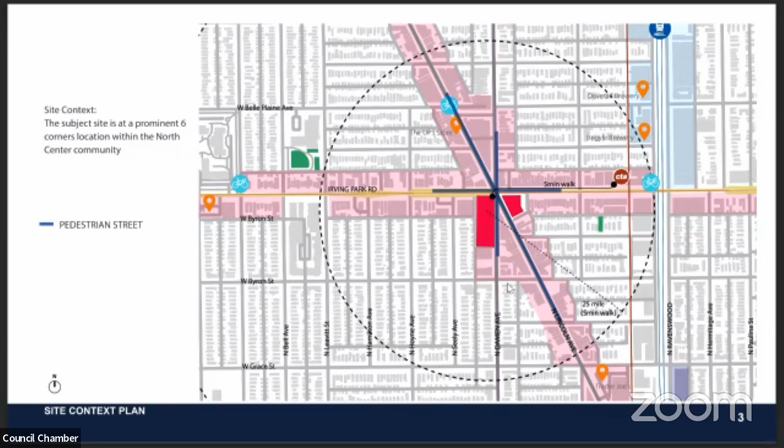This is a unique partnership between a market rate developer and an affordable housing developer, and together they are planning a transformative project for the North Center neighborhood. Alderman Martin and his staff were instrumental in developing the vision for a project that leverages private investment in a market rate project for the benefit of a 100% affordable project at this prominent location, which is shown here and located on either side of Damen Avenue at a six corners location intersecting with Lincoln Avenue and Irving Park Road.

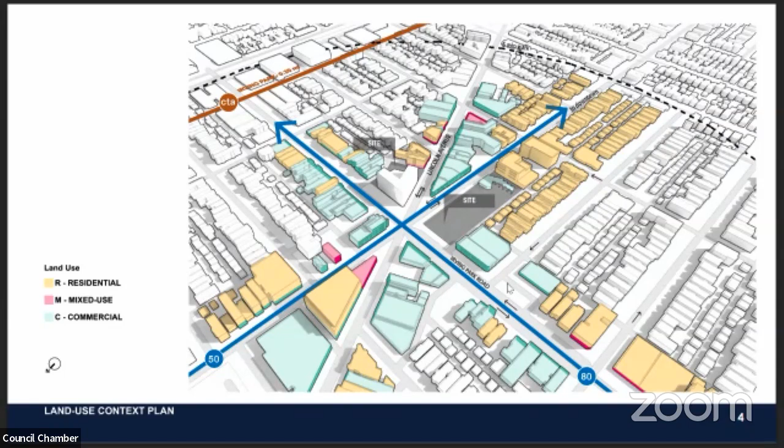You'll note on this slide that there is a range of land uses in this immediate area, including commercial, residential, and mixed uses, which are indicated on the slide.

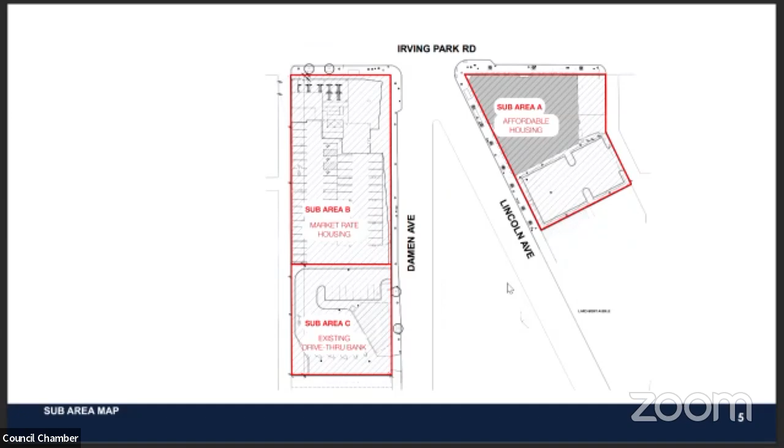In just a minute we'll get into the details of the plan itself, but this slide shows the three sub-areas. The market rate project is in sub-area B and is located on the west side of Damen Avenue. The affordable project is in sub-area A and is located at the southeast intersection of Lincoln and Irving. Sub-area C will remain a drive-through bank operated by Fifth Third Bank, which is the current owner of the properties consisting of sub-areas A, B, and C.

What makes this project particularly unique and compelling is the partnership between the market rate housing developer and the affordable housing developer. Sub-area A will be conveyed to a Brinshore-controlled entity and developed as 64 units of permanent supportive housing for survivors of gender-based violence. Every unit will be affordable along a continuum of affordable rents and unit types. Many of the occupants will be immigrants and refugees and will receive assistance from CHA and other sources of subsidy.

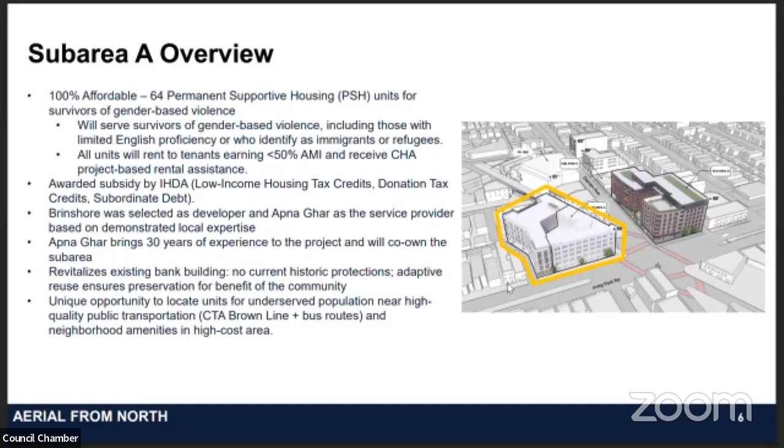The affordable project has received an allocation of low-income housing tax credits and other tax credit sources, as well as conventional sources of financing. Through the Alderman's leadership in the community process, Brinshore was chosen as the affordable housing developer and Apna Ghar as the service provider. Together, they will rehabilitate and adaptively reuse the existing bank building and the larger bank building, what we refer to as the white building on the corner, and fulfill a critical need for the affordable housing and supportive services that are required for the benefit of this vulnerable and underserved population.

It's also located at a transit-rich location served by train and bus modes of transportation in an area of the city at which there would otherwise be very few housing options available for this community of residents. It's been my personal pleasure to work with the development team, aldermen, city departments, and neighborhood to deliver a project that is both pioneering and worthy of this commission's support.

I would like to now turn the presentation over to Johnny Noble from the Lamar Johnson Collaborative Architects, who will walk you through the project in a bit more detail. Great, yeah, and I'm Johnny Noble, design architect with LJC. I'll go kind of quick, so if you have questions at the end, we can go back to anything.

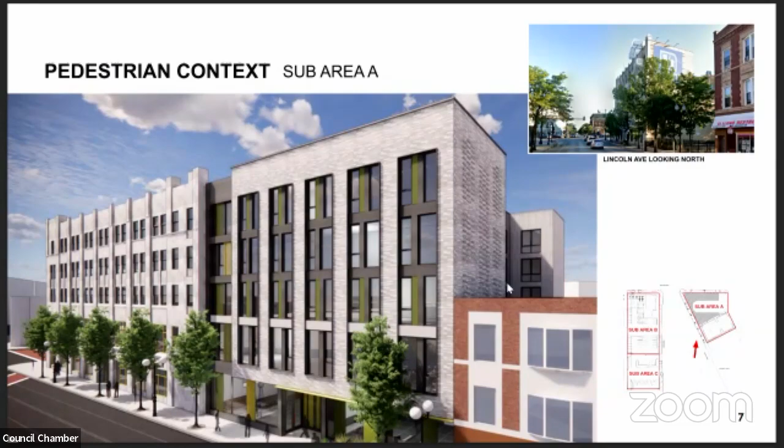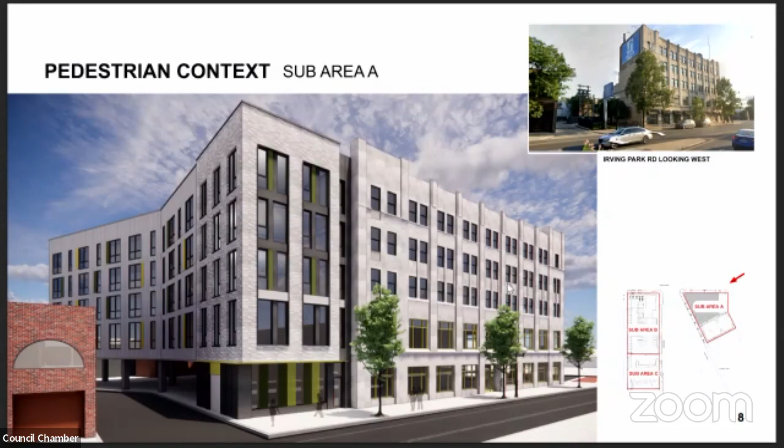So what's on the screen is sub-area A, the existing building on the left, the new addition on the right, sympathetic in materials and scale. This view is on Irving and Damen looking west. Again, the existing building to the right, the new addition wrapping around to the left, darker windows to match the existing, and a light color brick to match the existing tone.

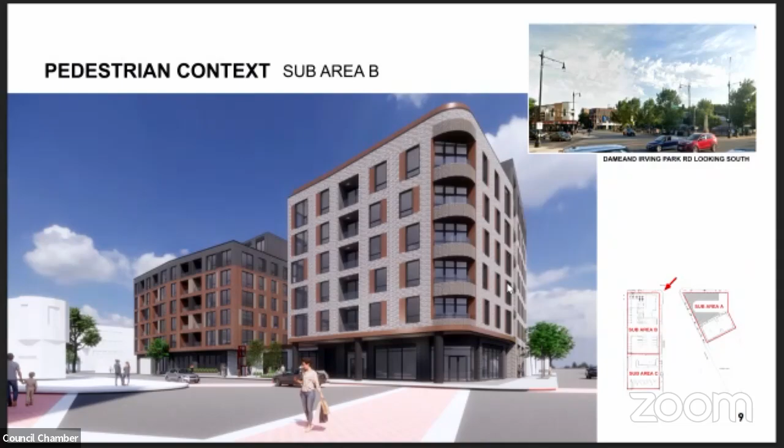At sub-area B, this is the now vacant site. This is a view right at the corner of Irving and Damen, looking at the prominent Six Corners intersection. You see the rounded corner as a prominent architectural feature to express that. As we come down Damen, now looking north, this is the new entry plaza that has ample space for some future public art, as well as adds quite a bit of relief for what could be a large building as you move south along Damen.

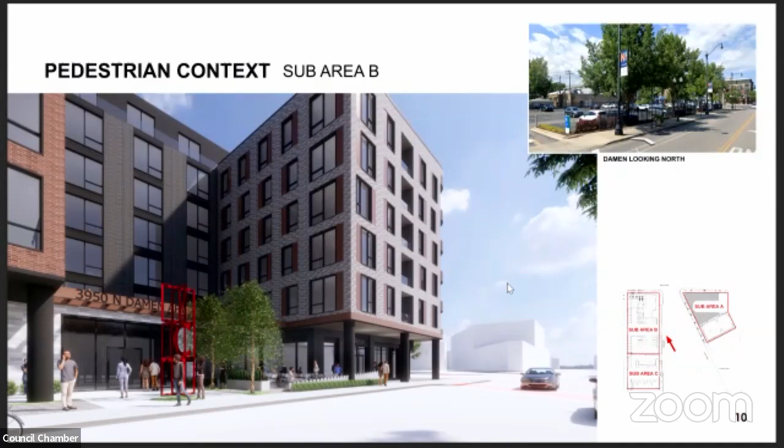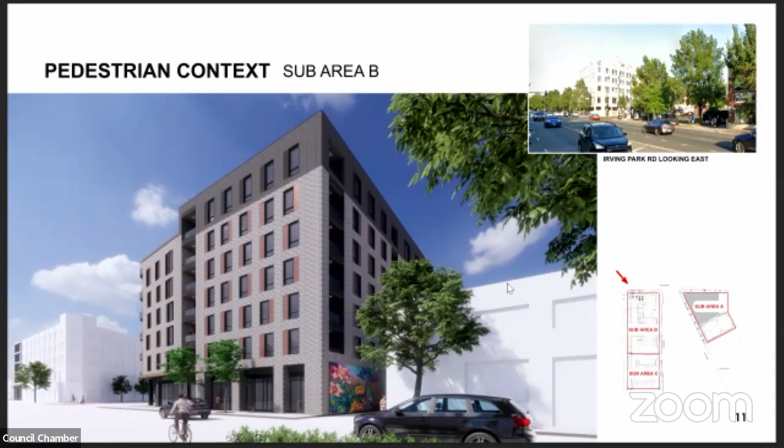This is a view on Irving looking east, and here we see again the lighter colored brick that should match the sub-area A tone of the existing and new buildings. Sub-area C is unchanged, as Rich mentioned, and is capped in the PD at 50 feet.

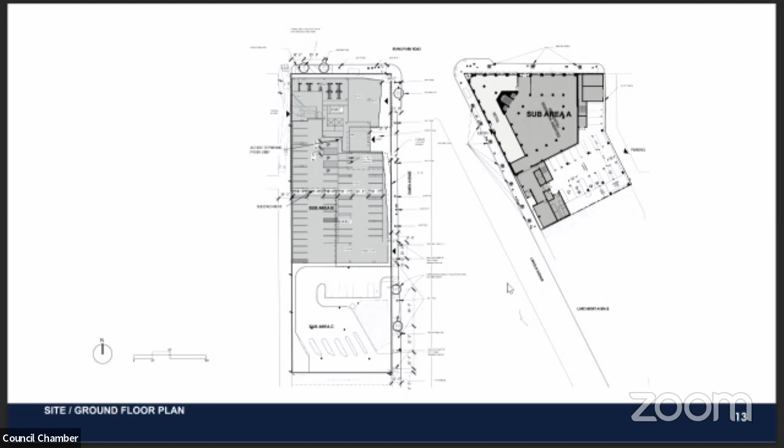The ground floor, both projects have a combination of parking, retail, and amenity. Sub-area A has 18 cars, very generous amenities for the residents, and some retail at the corner. Sub-area B has retail at the corner, as well as some amenity in the lobby as we move down Damen, and then 54 parking spaces.

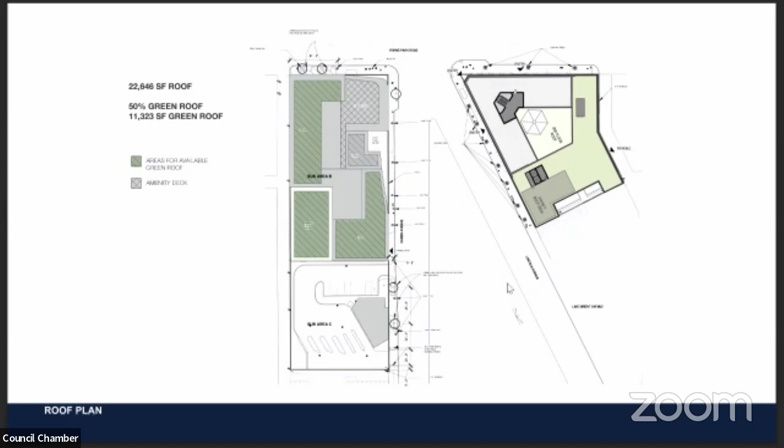Sub-area A has 64 units as mentioned, mostly 2s and 3s. Sub-area B has a total of 130, largely 1s and 2s. The project will have a 50% green roof as part of the sustainability policy. The market rate project will have an amenity deck on the 6th level.

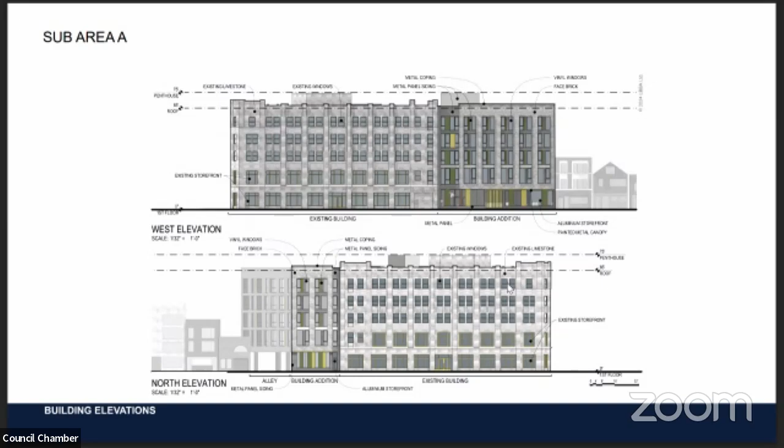The east and south elevations of the same project are secondary elevations on the alley and within the courtyard created, comprised of the fiber cement panel. So the primary elevations along the public streets are brick and metal panel, and the secondary elevations are fiber cement, still with an accent of metal panel.

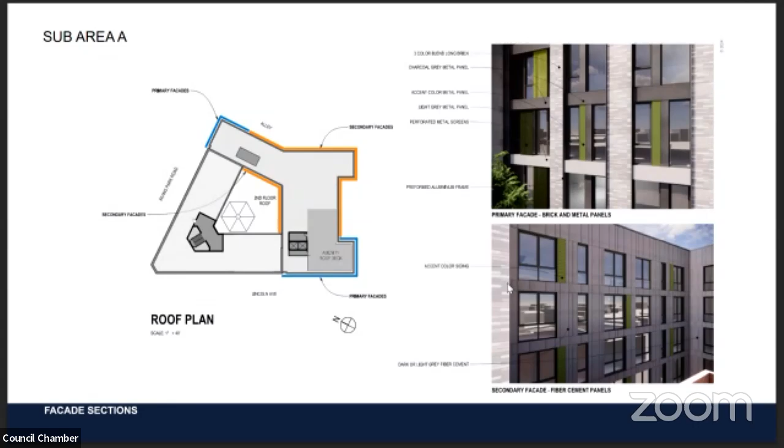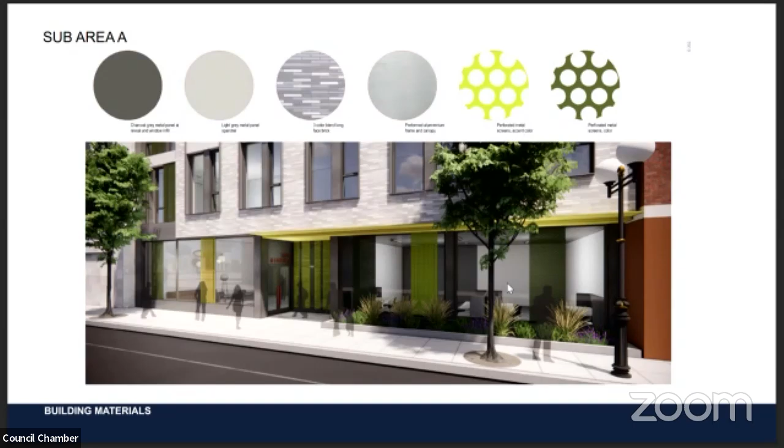The entry of sub-area A, you can see how they're using some nice green perforated metal to accent the entry, and then the remaining facade is a blend of light colored brick and metal panel.

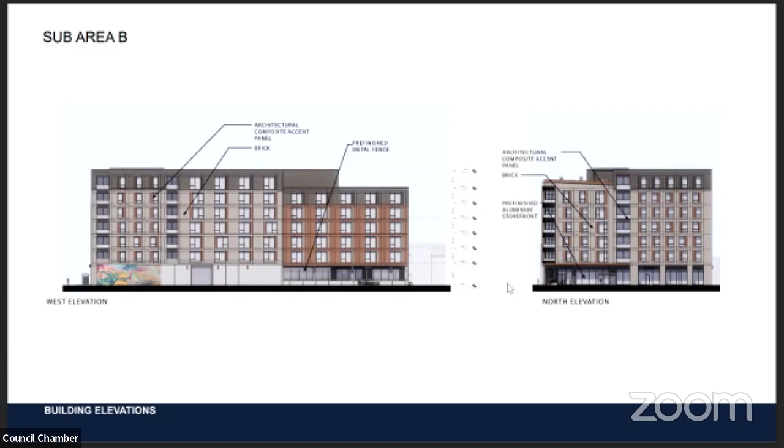The west and north elevations are also comprised mostly of brick with an accent of metal panel, and the balconies highlighted as vertical reveals.

The aerial here shows again the brick, how it changes per massing to break the scale as we go down Damen, with a light color brick at the corner, and then the red and gray accent panels throughout.

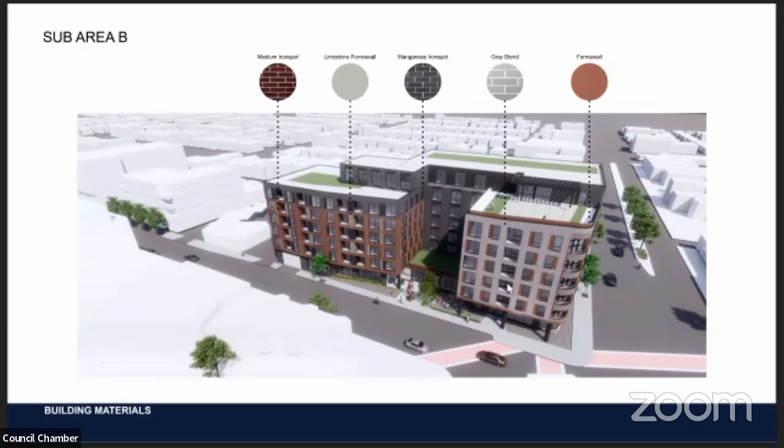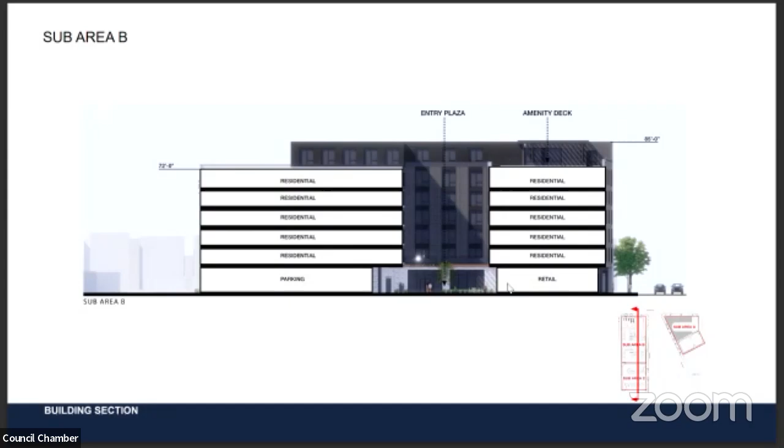Sections simply show this is residential over public amenity and retail. This is sub-area A, capped at 75 feet. Sub-area B has a maximum height of 85 feet, with 5 levels stepping up to 6, or 6 stepping up to 7, with retail over amenity and parking.

A little more detail in the axon. On the right image, you can see that high identity corner as rounded brick. On the left image, you see the recessed balconies creating more relief along the facade.

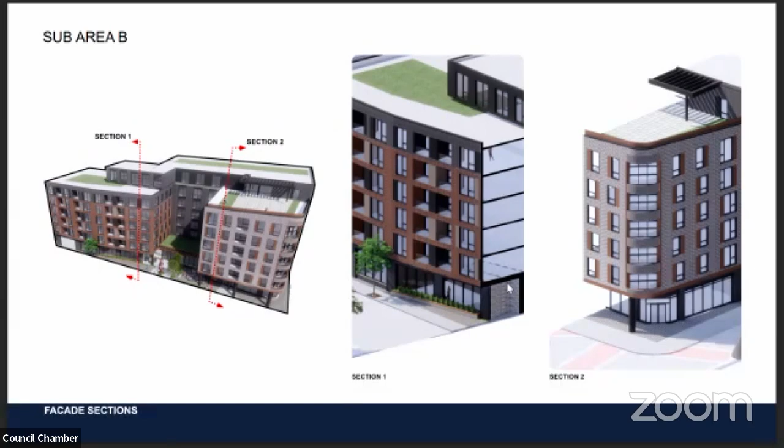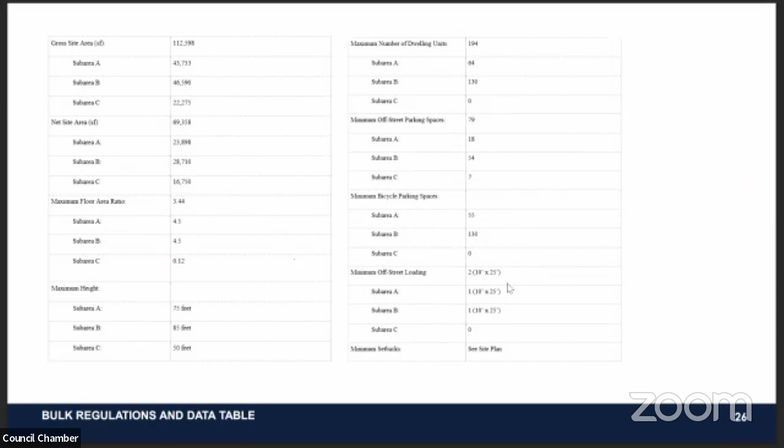The bulk table for your reference, a lot of it's been mentioned already: capped at 3.44 FAR for the combined site, with height of 85 feet for sub-area B, 75 for sub-area A, and 50 for sub-area C.

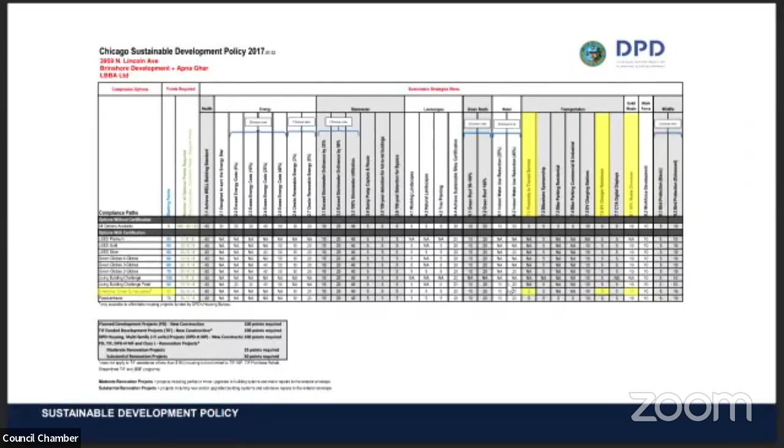We're still, until the end of the year, in the 2017 Sustainable Development Policy, so that's what we're going with. For sub-area A, a large portion of the points will be from Green Communities certification. For sub-area B, there will be a collection of points through energy, water, transportation, and others to get to the 100 points required.

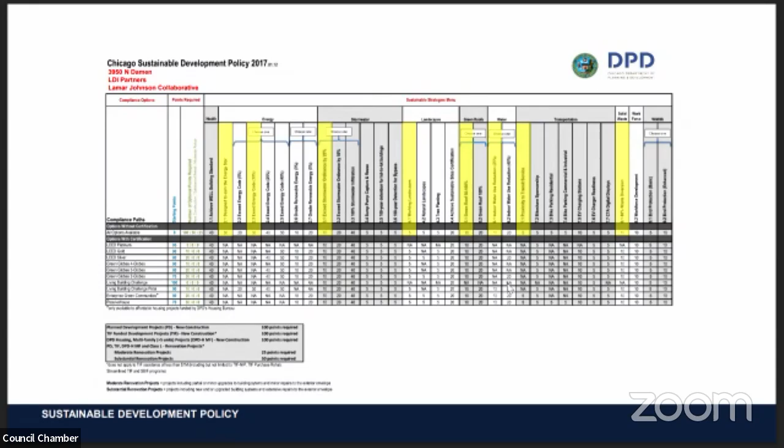In terms of open space and landscaping, I've already mentioned on sub-area B the 2,800 square foot entry plaza. That would be a great spot for some public art, as well as give some relief to the bus stop that is along Damen.

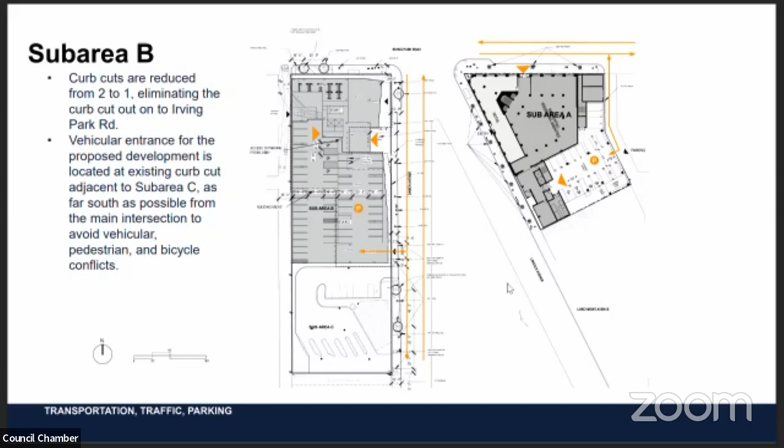In terms of circulation, sub-area A is accessed with its parking off of the alley, and then entries both on Irving and Lincoln. Sub-area B accesses its parking through Damen. There are currently 3 curb cuts on the site; we're coming down to just 1 for sub-area B, and loading is serviced off the alley.

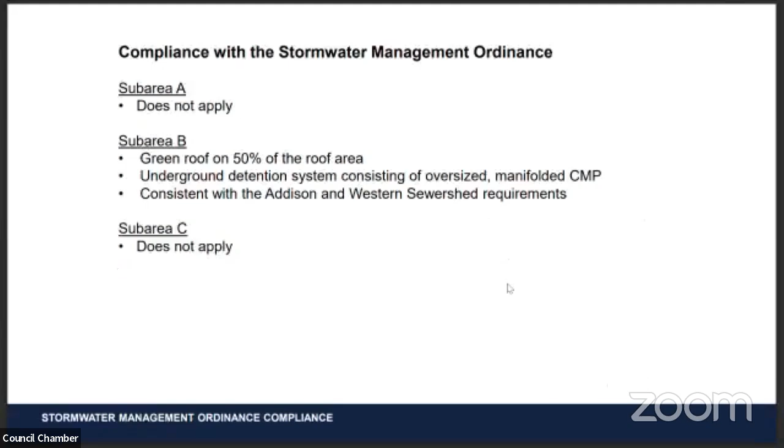Stormwater, again, the 50% green roof combined with underground detention will take care of the stormwater management ordinance.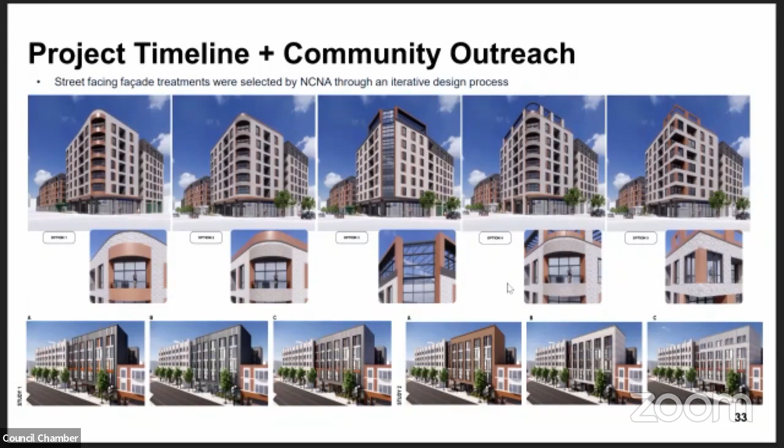This is a unique application of the Affordable Requirements Ordinance. We owe a great debt to Alderman Martin and DOH for helping us land on this approach. From the standpoint of the ARO, this project has 64 affordable units among a total of 194 units, meaning that on an overall basis, about a third of the overall unit count is affordable.

Income levels for the affordable units are also well below the minimum average weighted AMI of 60%. This is due in part to the permanent supportive housing units and the nature of those units, for which that project receives project-based rental assistance through the Chicago Housing Authority.

A quick word about the economic benefits before I pass it back to Danielle to close. There are other substantial public benefits associated with this project. In addition to the creative approach to providing affordable housing at this north side location to a vulnerable group of residents whose access to housing would otherwise be severely challenged in this neighborhood, we anticipate upwards of 230 construction jobs, several permanent jobs, neighborhood retail opportunities, open space enhancements, improved streetscaping, and of course, robust M and WBE participation pursuant to the terms of the city's executive order.

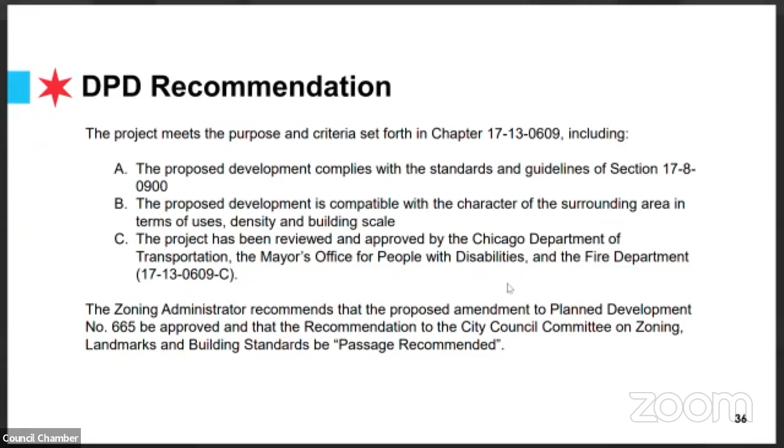For the record, my name is Butler Adams. I just want to stay consistent. I am in favor of this project.

I got a chance to go to the community meeting at O'Donovan's back in January of, I think it was 2023, so last year. And I liked the project then, I like the project now.

I like the brick articulation of the building. Not necessarily a fan of the metal panels, but I think it's a good addition to the neighborhood.

I know that the height has been reduced and the unit count has been reduced. I do wish that the unit count could have remained the same, even just by bumping up the height of the building a little bit.

I know there was some concern regarding some of the neighbors about the height of the building, but I don't think taller buildings inside of neighborhoods on commercial corridors are that bad of a thing. You look at Northwest Tower or the Coyote on, what is that, Damen, Milwaukee, and I can't think of the other cross street right now. But it's a 12-story tall building. It's been around nearly 100 years, and it doesn't impact the neighborhood in a bad way at all.

But I do think this is a good addition, and I do hope that once you all decide to go with that final phase, what the bank is right now, because you reduced the size, you can restore the 40 units that got cut from this project. And I also hope that you could possibly enhance that rounded base slightly more to make it a bit more prominent.

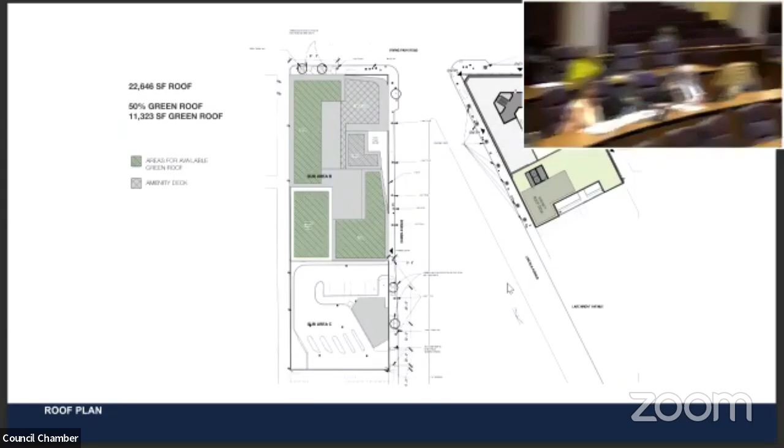If you wouldn't mind taking a, on the roof of the building, someone should take the mic please, introduce yourself. Tyler Brown with LBBA. The green roof on the roof of the building is accessible to residents, yes.

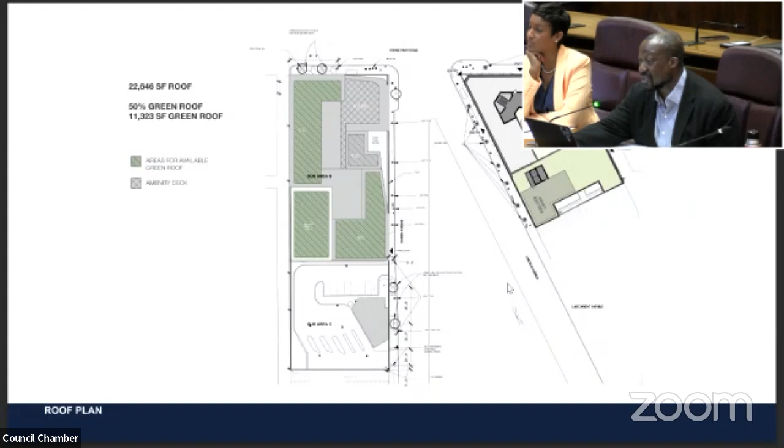Speaking on sub-area A also, I noticed kind of a unique way of laying the units out, almost kind of a shotgun, if you will. I do actually kind of appreciate the creativity. I would love to see how these actually rent, because I understand this site is very constrained and you're literally, in a good way, squeezing into units. Down the line, once this gets constructed, I would love to see how these rent, because I think this is a nice creative way to solve some other unit layouts. Just slide 14, yes.

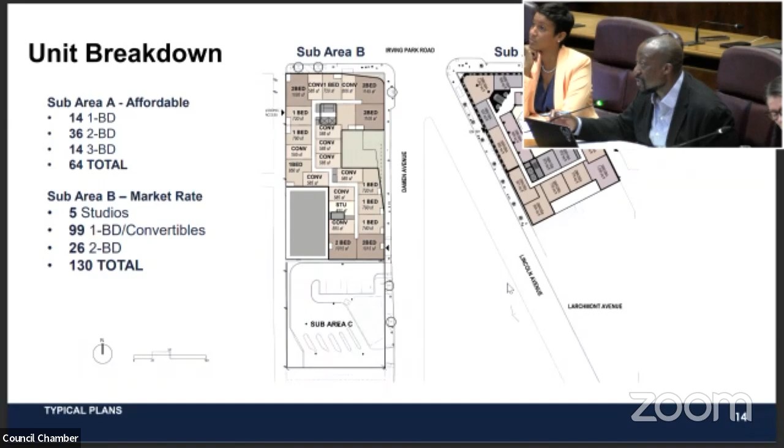It was just more of a comment, not sure if you can zoom in on this, but the units in particular, Commissioner Dow, that I'm speaking to are these kind of longer units. Typically, those units on a double-loaded corridor building tend to be 27 and a half plus or minus feet. These are pretty narrow units and long units. How wide are those units roughly? They're much less than 27 feet. Yeah, the existing floor plate of the bank is pretty shallow, so getting the double-loaded corridor made for wide but shallow units.

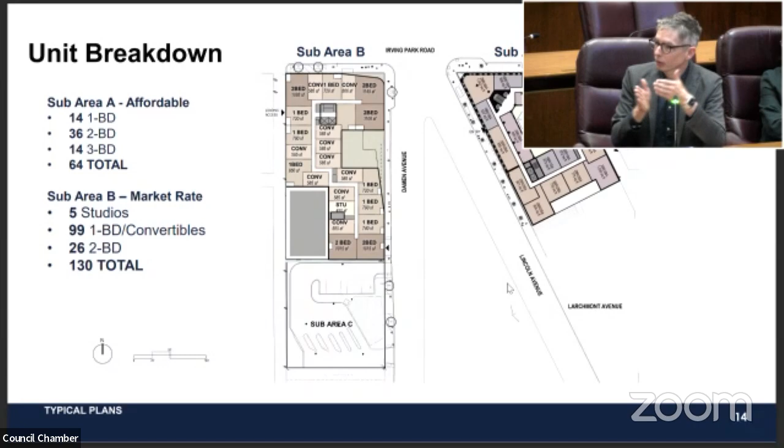I think they're something like 18 feet deep, 18 feet in depth. But we think it's going to actually make pretty nice units because they're going to have a lot more windows than they normally would on a narrower, deeper floor plate. No, we'd love to see how these rent down the line, it could be an interesting prototype that gets introduced on other buildings. And to clarify, that's part of the affordable building, so it'll be part of the services they provide. Understood.

I do understand that Josh Mark is here on behalf of Alderman Martin to make a statement on his position, letter on file. Thank you to members of the commission. Alderman Martin could not make it today, so I'm Joshua Mark, his chief of staff. With me is Lucy Nye, our director of development, and I'm here to relay the alderman's proud support of this quite groundbreaking, certainly equitable transit-oriented development.

As we understand it, this is the first instance of a development containing permanent supportive housing that is dedicated solely to survivors of gender-based violence in the city of Chicago. What the alderman wanted me to highlight as well is the extent of the community engagement and conversations that have taken place, as was highlighted earlier by Rich.

Since we started talking to the development team back in 2020, we have hosted no fewer than 4 public community meetings and no fewer than 8 smaller meetings with members of both the North Center Neighbors Association and the North Center Chamber of Commerce. In total, as best we could tell, we received a minimum of 1,000 comments from the community on matters ranging from affordability to aesthetics, height and bulk, but also pedestrian safety and cyclist safety.

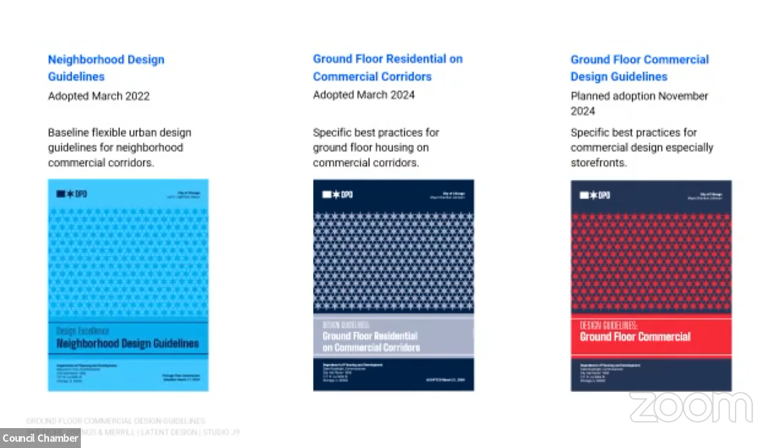The purpose of these design guidelines: the project duration has been October 2023 to November of this year. These will create a set of user-friendly design guidelines and best practice examples specifically for non-design professionals.

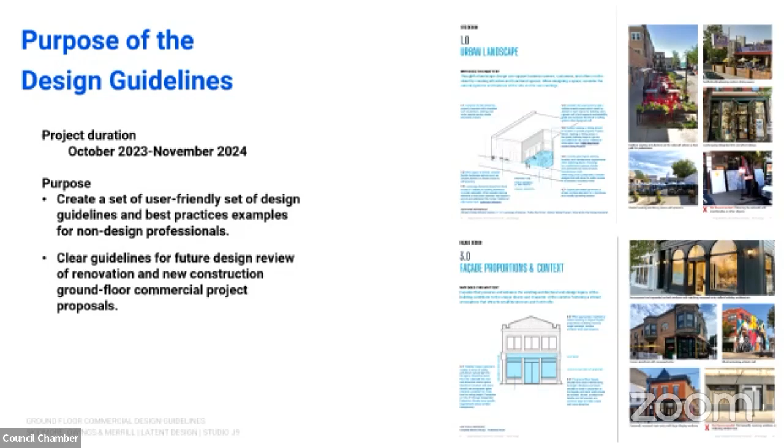We are providing clear guidelines for future review of new developments as well as renovations. On this slide, there are a couple of examples of spreads from the document.

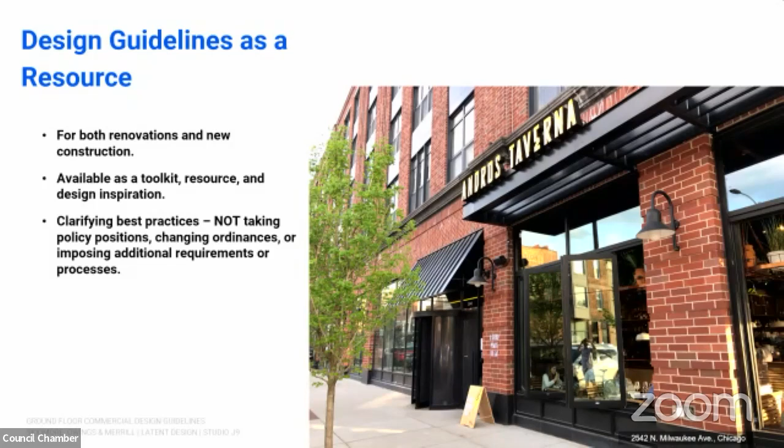As I mentioned, these guidelines are for renovations and new construction, and we are intending for this to be a toolkit, a resource, and design inspiration. This document is clarifying best practices. It's not taking policy positions, changing ordinances, or imposing any additional requirements or processes. This document is not intended to be an enforcement document in any way. It's to maximize opportunities for commercial storefronts.

The big intention for us for this project is to really look at what common examples of ground floor commercial design challenges are throughout the city. Often we'll see temporary signage used as a long-term solution, windows being covered, excessive lighting, views into stores being obscured with excessive signage, mismatched materials, low quality materials as well, and actually reducing the size of windows and existing masonry openings.

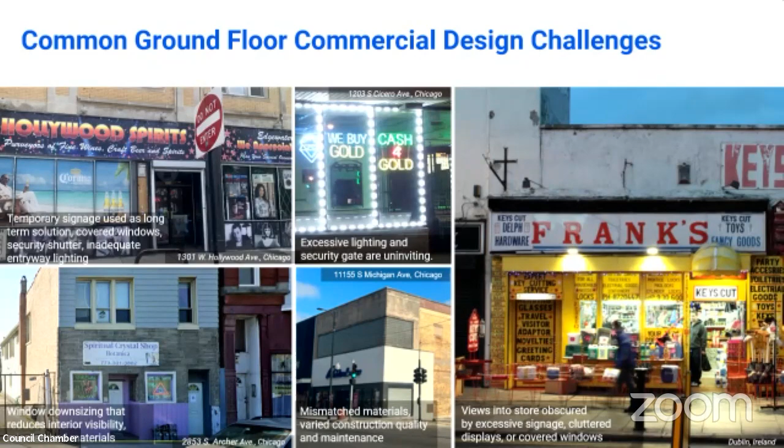Onto the guidelines themselves. This document is broken up into three main sections: site design, which addresses landscaping, access, and entries; facade design, which addresses proportions and contexts, details and styles, materials, doors, windows, signage, and exterior lighting; and then we have six case studies at the end of the document to show tangible examples for folks to use.

For the first objectives, I should mention at the beginning that increasing visibility, providing guidance on good materials, helping brand businesses appropriately, and helping create a welcoming atmosphere are applicable to every single objective to follow. For site design, landscaping and access and entries are entailed in that.

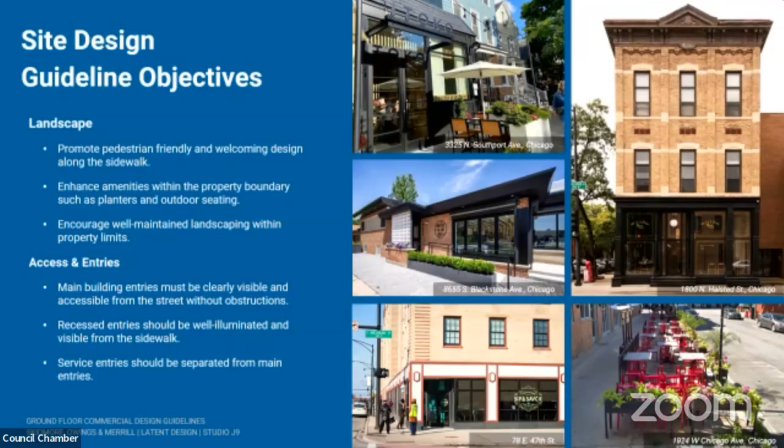Promoting pedestrian-friendly and welcoming design, enhancing amenities within property boundaries, and encouraging well-maintained landscaping are integral to that. For access and entries, main building entries must be clearly visible and accessible from the street. Recessed entries should be well illuminated and visible from the sidewalk, and service entries should be separated from those main entries. Those are just some examples of what is covered in those.

Onto our second section, which is facade design guidelines and objectives, which is kind of the meat of the document.

Facade proportions and context are addressed, so improvements should complement or be visually consistent with adjacent buildings, considering all sorts of factors like architectural styles, materials, color, and scale. Facade details and styles.

That's really keeping a cohesive element to storefronts within the context of the architecture of the building itself. Facade materials address preserving or repairing high-quality building materials when possible, especially since so many buildings in the city have unique architectural character. Also, replacing or repairing certain elements for storefronts is important as well.

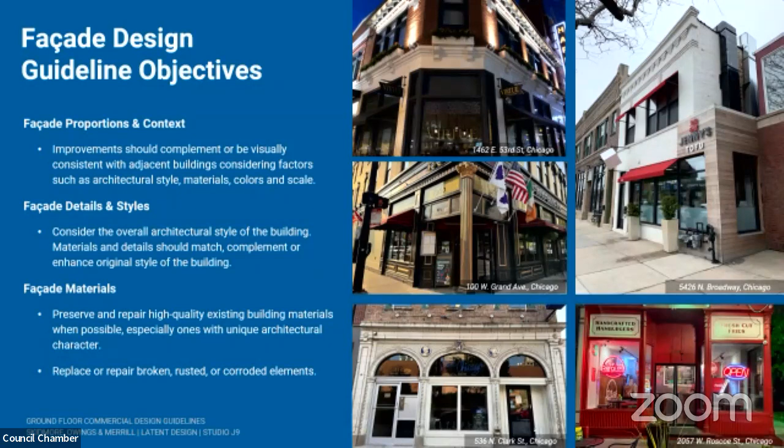Continuing with facade design guideline objectives, these also entail doors. We have examples of retaining doors with complementary style to the building facade and also considering the context of surrounding buildings, really hammering home the point that doors should allow visibility from the sidewalk for pedestrians and customers.

Window design is the next objective. We talk extensively about materials, styles, restoring window proportions to increase visibility, and avoiding what we saw in the challenges earlier, which is blocking views through windows with excessive temporary or permanent coverings. We also get into sustainability, bird-friendly window design, and other items such as that.

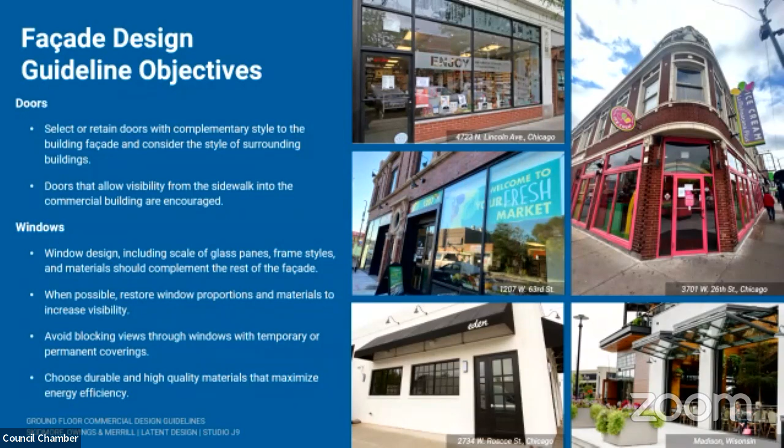Also, I failed to mention in the previous slide, for windows and doors we also addressed security gates and shutters in the document, which, if they are going to be installed, should be on the inside of any windows and doors. We have examples of design that is aesthetically pleasing as much as possible when you have security gates or shutters, but that is also addressed.

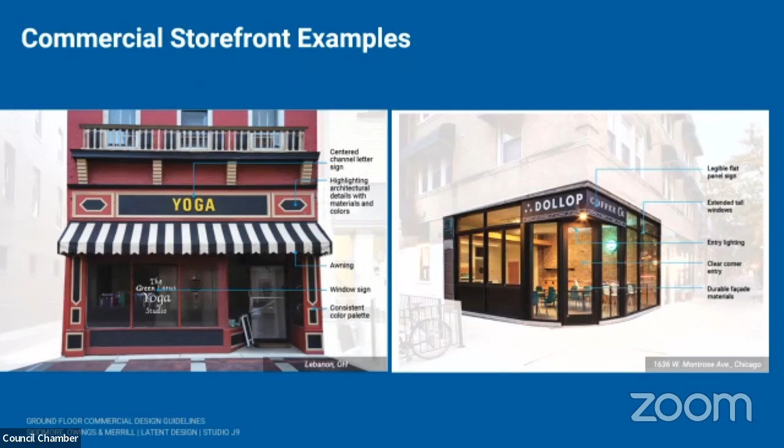And then for my personal favorite case study in our document, an example from 2135 West Chicago Avenue. This one is really wonderful because it shows an actual transformation from a not great commercial storefront to a really, really beautiful one. You can see the before and after pictures.

The owner of this building installed a new fence and landscaping, new door, tuck pointing, added consistent colors and matching materials, because even though this document specifically focuses on ground floor storefronts, the fact that we can have projects that complement even the floors above those storefronts really contributes to the overall aesthetics.

Also a permanent door sign, and that deteriorating mansard awning was removed. You can see that the windows were made much larger, clearer, and everything is just more consistent and clean. And I shouldn't forget also a fantastic, very colorful mural on the side of the building, because once it's wintertime, we could use all the color we can get.

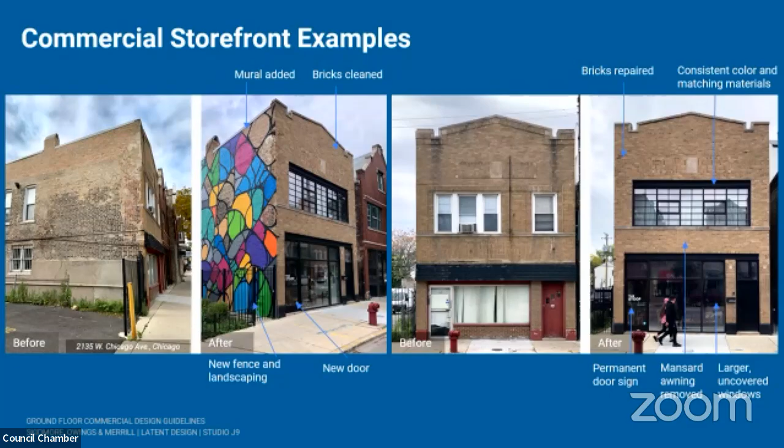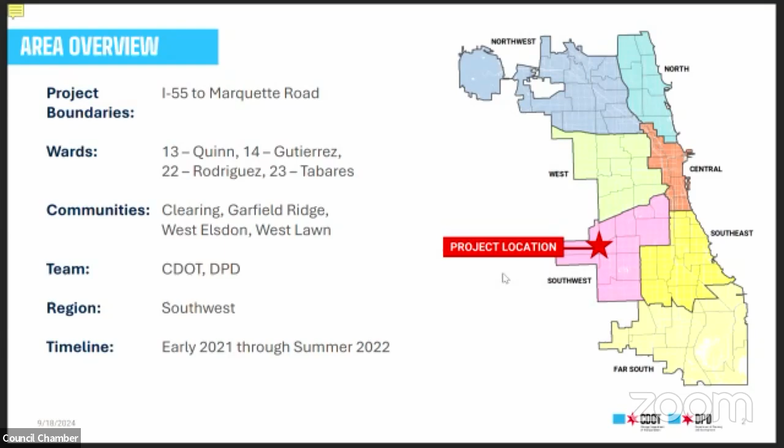Here you can see the general study area with Cicero Avenue corridor itself outlined in yellow. I will note that this map shows old ward boundaries, but the same 4 wards cover the corridor in the latest remap. The area has an overall population of about 112,000 people, 26% of which are white, 2.3% African American, and nearly 70% are Hispanic or Latino.

The area is generally younger, and household incomes range from about $64,000 to $90,000.

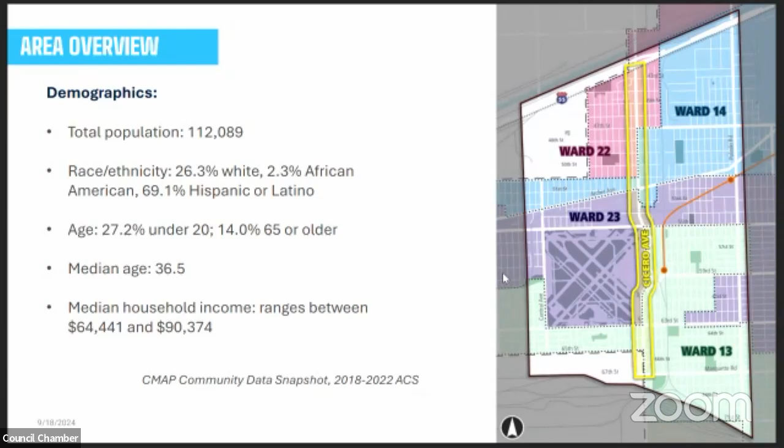The purpose of the Cicero Avenue Corridor Study was to conduct a thorough analysis of roadway conditions and private development along the corridor in order to develop alternatives for corridor redevelopment. The study includes both a transportation and infrastructure section and a land use section, and outlines a series of goals that aim to address the needs of all users of the corridor and position Cicero Avenue for future investment.

The study included a community engagement process, market analysis, evaluation of existing public realm conditions, and recommendations for improvements, land use and design guidelines, and a robust implementation section and resource guide for future improvements.

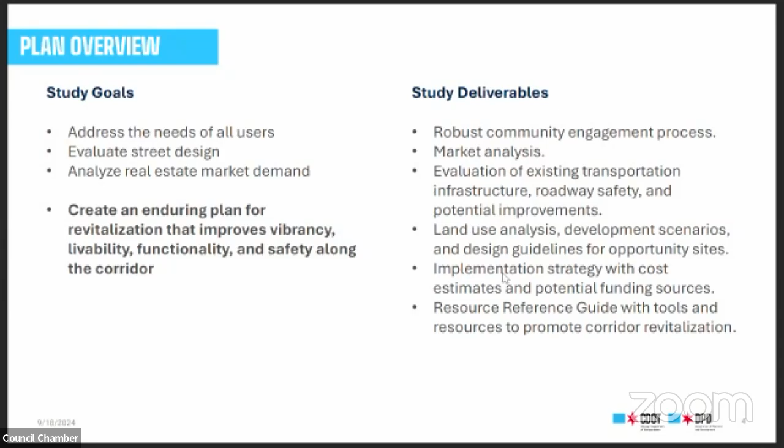Based on our analysis of what we heard, the existing conditions are summarized on this slide. The main takeaway, which is no surprise, is that Cicero Avenue is a car-centric corridor with safety and accessibility issues for all roadway users. This includes a high number of automobile crashes at major intersections, speeding, and a lack of pedestrian safety with little buffer between pedestrians and cars, poor sidewalk conditions, and long road crossings.

Land use follows a similar auto-oriented pattern with smaller scale development set back behind surface parking lots and a number of vacant and underutilized properties that detract from the overall health of the corridor.

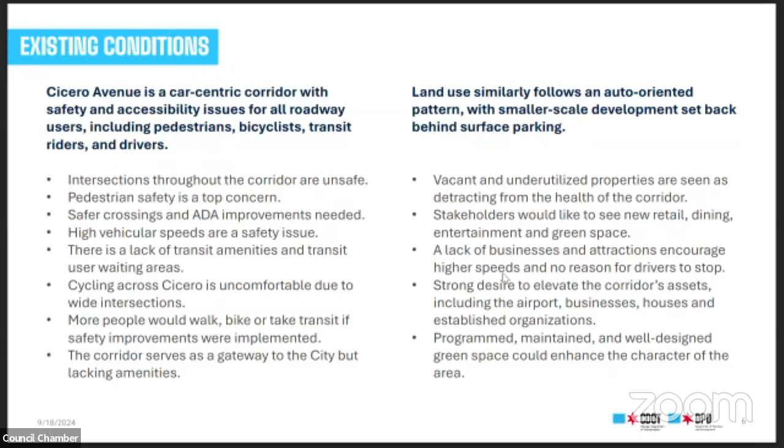Through the analysis, we found that Cicero Avenue can be divided into 4 distinct character zones. Each zone varies in character, such as land use, building pattern, and roadway characteristics. The northern and southern gateways have larger development patterns. Building frontages are set back further from the road, and there are planted medians and wider outer vehicle lanes in the southern portion.

The community commercial zone between 46th Street and 53rd Street has a finer grain mix of buildings and business types. The building frontages are closer to the road, and there are planted medians throughout.

The Midway Airport Zone is mostly defined by transportation infrastructure and airport uses. There's a large landscaped parkway on the west side of Cicero. The building frontages are set back from the road, and there's a mixture of painted and planted medians, large landscaped parkways, and wider outer vehicle lanes. These character zones help to inform and define infrastructure and land use recommendations for the corridor.

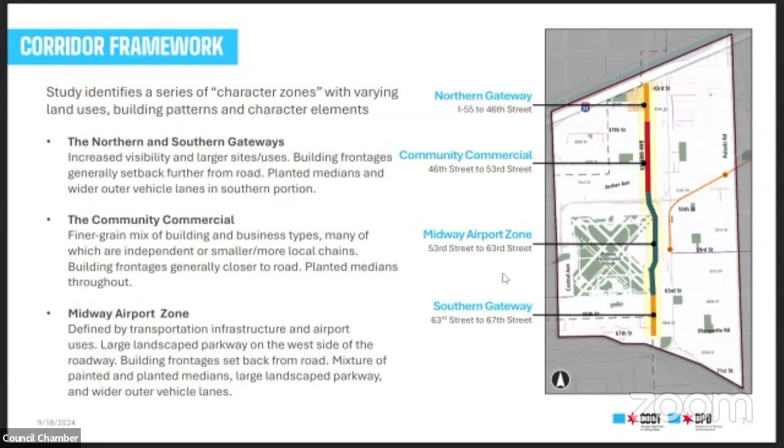The study examined existing street cross-sections along the corridor and presents concept alternatives for increased pedestrian and vehicular safety. Currently, the corridor has a wide 16-foot planted median to the north and a 16-foot painted median to the south. The mid portion from 53rd to 63rd has a 13-foot painted median. In the middle and south portions of the corridor, there is a wider outer travel lane.

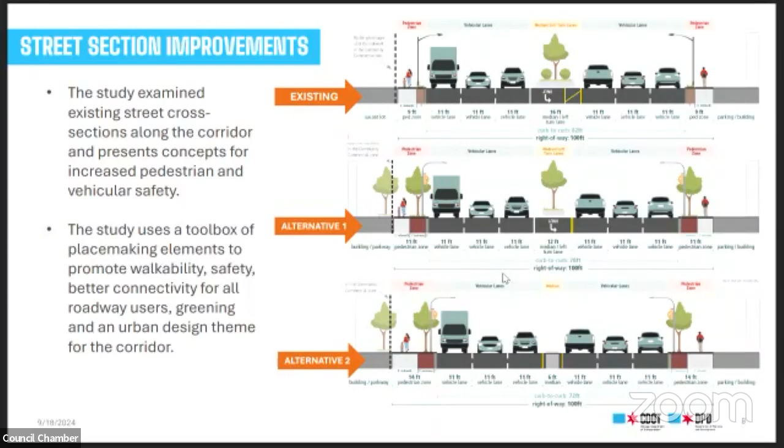The traffic analysis showed that eliminating travel lanes was not feasible due to the high traffic volumes. However, by narrowing the 16 and 13-foot center medians and right-sizing the wider travel lanes, additional space could be allocated to the pedestrian zone, addressing many of the concerns heard during public engagement. Alternatives for improvements include either a reduction to the size of the landscape median or replacement of the landscape median by a 6-foot concrete median so that the extra width can be allocated to the pedestrian zone. Both alternatives would increase the number of street trees significantly on a corridor that has very few trees due to the narrow sidewalks.

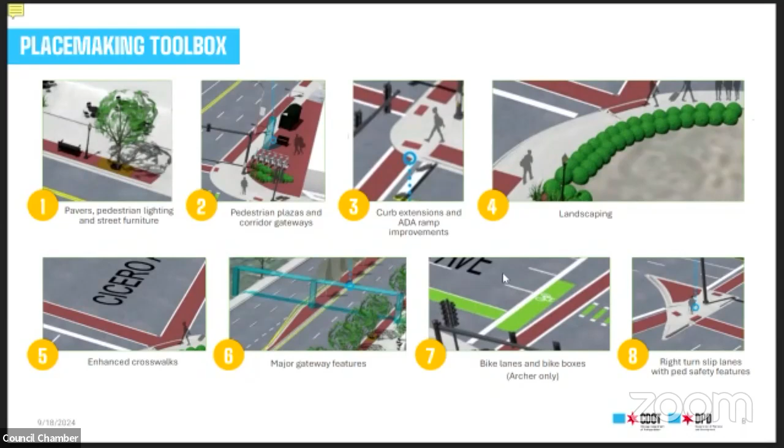A placemaking toolbox was also included to recommend improvements that would support walkability, safety, connectivity, greening, and community character. Such improvements include new lighting, street furniture, curb extensions, landscaping, enhanced crosswalks, gateways, and other bike and pedestrian safety elements.

Three corridor character themes were also developed based on public feedback. Theme 1 draws on the airport located at the heart of the neighborhood and corridor. Although Midway is an international airport in a large city, the airport in the neighborhood was a term brought up during community engagement. Theme 2 is inspired by the City of Chicago design standards, iconic landmarks, natural features, the Chicago flag, and the history of the city.

With proximity to an international airport, Cicero Avenue provides the opportunity to not just highlight the character of the immediate neighborhood, but also the character of the city as a whole. Theme 3 draws on colorful images evoking a sense of neighborhood that has been developed for other communities in Chicago. Rather than representing one cultural identity in the branding, neighborhood images can represent the connection and diversity of people and places in surrounding neighborhoods.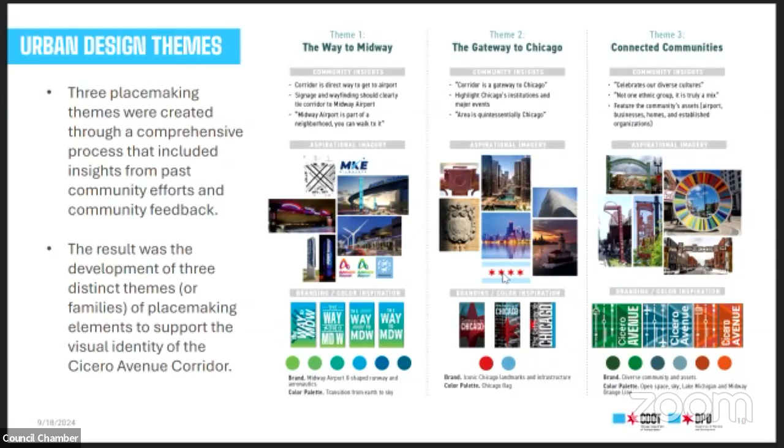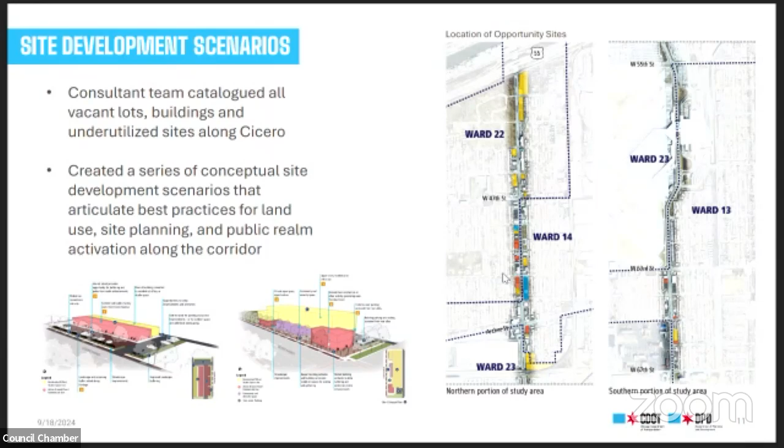The study also catalogs all vacant lots, buildings, and underutilized sites along the corridor and articulates a series of conceptual development scenarios that illustrate best practices for land use, site planning, and public realm activation. These best practices are illustrated across a series of 7 site development scenarios that provide ideas for how new development can best engage with the street, improve curb appeal, and increase pedestrian safety along the corridor. This study also provides a set of design guidelines that cover areas such as public space, programming, site design, massing, facade, and sustainability.

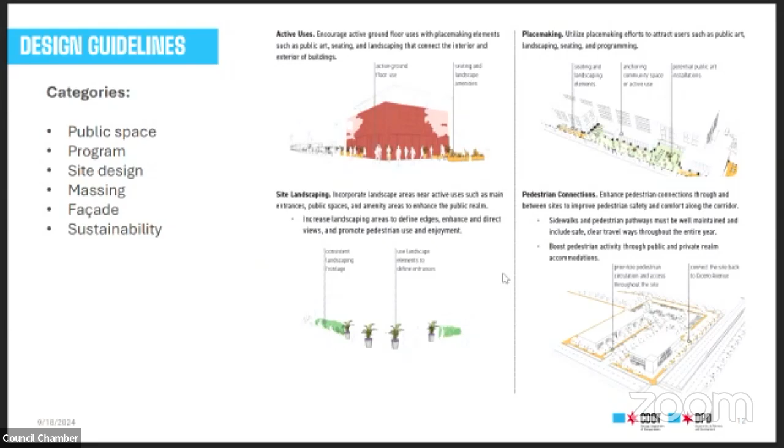Finally, the study includes an implementation section that outlines cost estimates and recommended phasing for physical realm improvements, funding opportunities, and a resource guide for local investors, businesses, and community organizations to improve their corridor. The Cicero Avenue Corridor Study is available for review and public comment at chicago.gov/Cicero Avenue Study. It will be posted for the next 30 days, and city staff will consider any comments before bringing the final report to Plan Commission in November for formal adoption. At this time, we would be happy to answer any questions you might have.

My apologies, we are paying attention here, so we're actually commenting on this. Do the commissioners have any questions of the staff or the applicant? Not, I do understand. Oh, I'm sorry. Yeah, no, don't apologize, Commissioner. Yes, oh sorry, just a couple of quick questions.

In terms of just a timeline, I mean this is wonderful. I know this entire area, and I think looking at just some of the greenery and ways that you are going to attempt to mimic other communities, especially since there's just so much concrete along the majority of this area. So what is the timing on that? What is the start and end point? Is this just now a kind of vision and still community engagement, or what is the timeline of the different steps, I guess? And I know you covered it, but more the reality behind that.